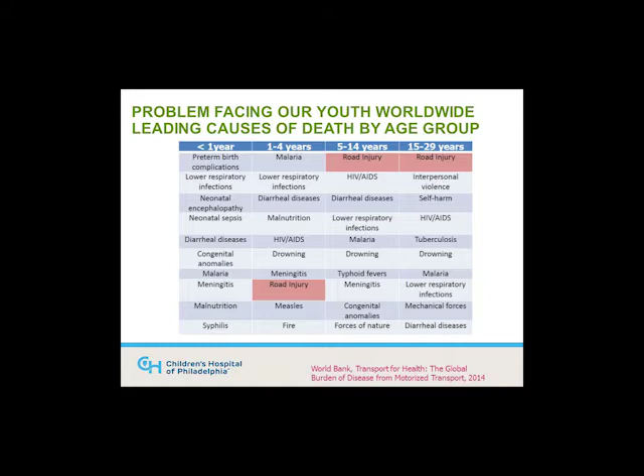to help see the future where we can actually bring these injuries to zero. So a quick overview: if you look at the data from the World Bank Transport for Health, this is data from 2014, children younger than 14 years of age—road injury is still one of the leading causes of fatality by age group. If you look at ages 1 through 4 beyond, and up till teenage drivers and young adolescents, you can see that road injury, motor vehicle crashes, are still the primary cause of injury and fatality.

And this is primarily attributed to quite a lot of things. One of the coolest things we can attribute it to is increased restraint use. Data repeatedly has shown that the overall percentage of restraint use has increased. More stringent highway safety laws, and looking at the vehicular aspect of it—advanced restraint systems, airbags, roof curtain airbags, you name it, there are a whole bunch of airbags in cars now. Also, structural integrity of vehicles has improved significantly, causing this number to go down.

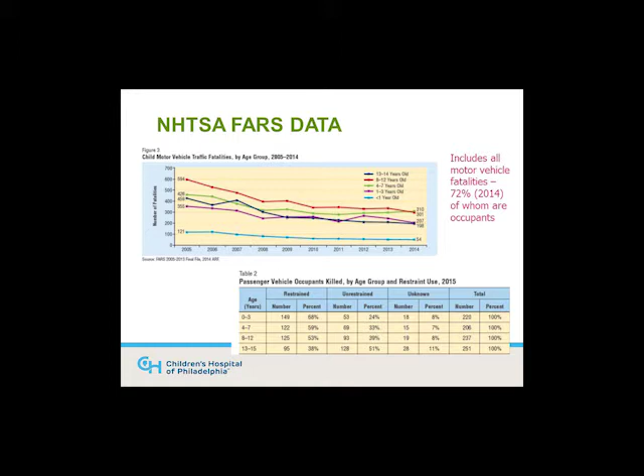If you look at some newer data from NHTSA, looking at what's called FARS data, or Fatality Analysis Reporting System data, this is actual fatalities. You can see the number—if you trace down the red line in the top plot, which is looking at ages 8 through 12 years of age, it's almost half the number in the last decade. But one thing I'd like to point out is that number is still in the 3 digits. We're not in the double digits, single digits, or even zero, and that's where we'd like to get to in the next decade or beyond—to look at those injuries.

One thing which is very interesting is some of the latest data that came out recently actually shows an increase in fatality.

The overall fatality rate has actually changed by about 6% in children under 16 years of age, and there are several different attributes to it. Most people associate this with improving economy and reduced gas prices, so you actually see a lot more vehicular density causing vehicles to interact more often, leading to fatalities or injuries. But obviously we need to do more research to understand the complex nuances to interaction, and understand that it's not a simple solution. There are complex entities going beyond to bring those numbers down.

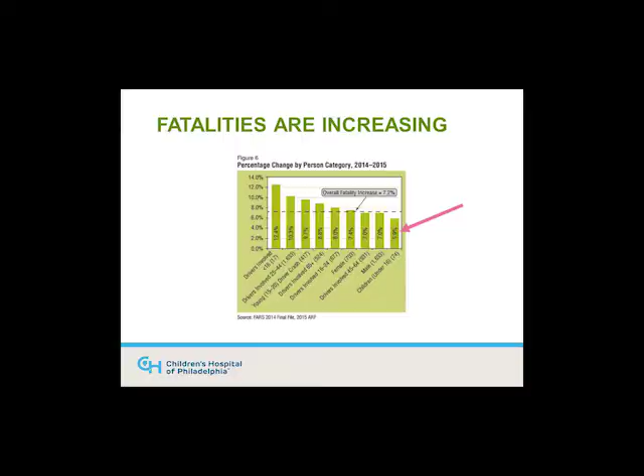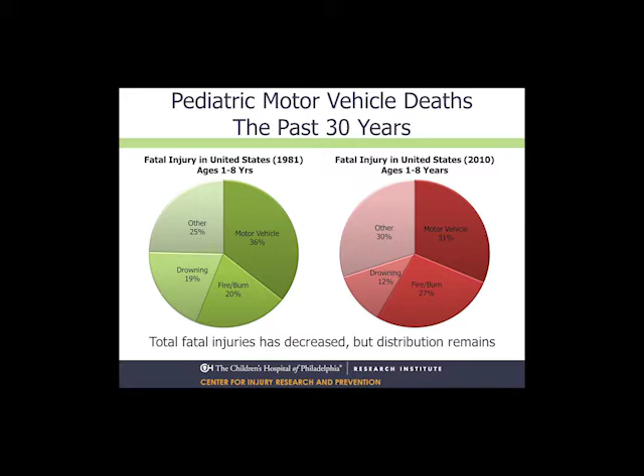So if you look at the last 30 years, if you pay attention to the left pie chart here, this is data from the early 1980s. The percentage, the distribution that you see in motor vehicles, that's about 36%, is still very similar. So if you fast forward by 3.5 decades, you would see that motor vehicles still has a substantial chunk that contributes to fatal injuries and injuries as such. Child motor vehicle injury is a very, very significant problem.

So with that in mind, I'd like to jump along and get to how did this all start? How did we even get down to understanding biomechanics, understanding how the human body behaves to unintentional external loading?

It all kind of started off in the early 40s and early 50s. Some of you have heard of the Stapp car crash conference, one of the premier leading conferences for our area of research. It's actually in honor of Colonel John Paul Stapp, who was at that time one of the pioneers for understanding high-speed impacts. He was a physician in the U.S. Army Corps, and he said there has to be a better way of studying these injuries.

At that time, we didn't have crash test dummies or computational modeling or other surrogates for human studies. So he said the only way I can get a better sense of this is to actually put myself in a deceleration experiment at that time using a rocket sled. You'd be surprised that he actually went from about 600 miles an hour to almost a standstill in about 1.4 seconds, experiencing about 46 Gs. I'm just going to play this video.

So this is a rocket sled. You can actually see John Paul Stapp strapped himself into one of these seats there. He crashes into a rigid barrier. That's actually a camera system floating about to keep track of what's happening and how fast he's actually going through. And it's interesting, he actually obviously survived this crash. He suffered very severe retinal detachments, but he was sort of the pioneer for human studies, human biomechanics studies, really trying to understand what it takes for the human body to sustain injury.

What are those limits? And obviously this was an adult study, but this kind of set the road and the path ahead for understanding what are the external forces, what are the boundary conditions, what are restraint systems.

And you'd be surprised, if you take a look at this again, you'd realize he's going at 600 miles per hour and comes to a standstill. Most automotive crashes today are looking at 30, 40, 50 miles per hour, and you see fatalities. So then you start thinking, how can he sustain or survive a deceleration so fast, but a 30, 40 mile per hour crash, people don't survive?

So that's when we try to understand the limits of the human body and also what sorts of deceleration, acceleration forces, injury tolerances, vehicular intrusion into the compartment, airbag systems, and so on would play a huge role in injury mitigation and understanding injury.

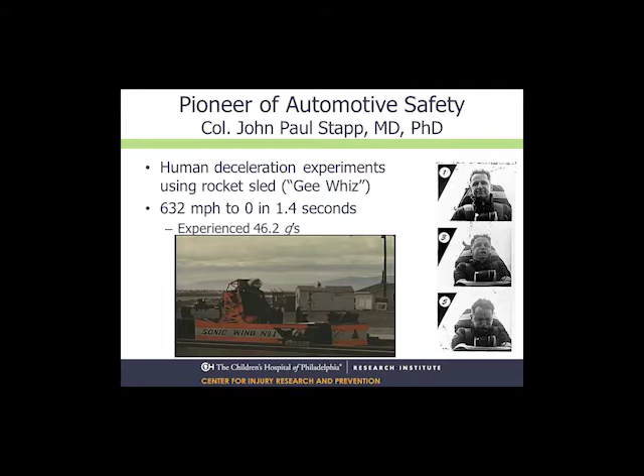So with that in mind, I'll jump along to looking at child passenger safety and the first car seats out there. Some of you might still see a few in the field. I'm a child passenger technician as well, and I see all sorts of seats in the market today. But thank God, we see some newer models out there and people actually doing a good job installing.

Some of the earlier seats were literally office chairs which were strapped onto cars, tied with ropes and other systems to protect the child. It wasn't a bad design, but it didn't really do a good job. And we've seen that we've really come a long way in safety. That's how things were in the early 40s and 50s, almost like a hoop sort of mechanism going over the car seat.

But Volvo in the early 60s was sort of a pioneer in coming up with the 3-point seat belt. And since then, things have really sped along in terms of regulations, CPS laws, and some advanced testing surrogates.

We're going to talk a little bit about anthropomorphic test devices, or dummies, or ATDs, and how NHTSA and the Department of Transportation is playing a huge and fantastic role in trying to understand these injuries and coming up with relevant laws to mitigate those systems.

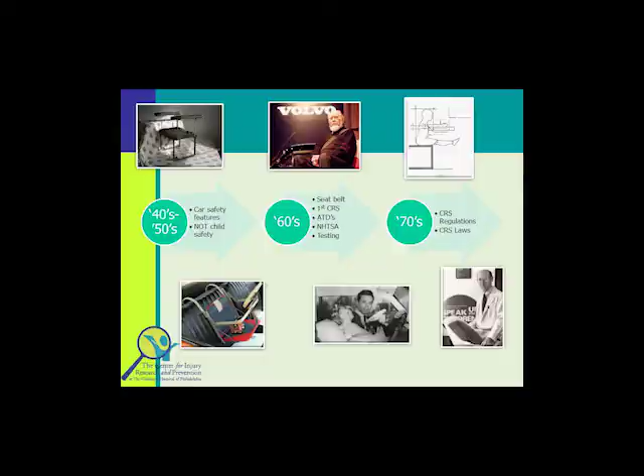So in trying to understand crashes, one of the first things we really need to pay attention to is what are those injury mechanisms, what are those stages in a car crash. For those of you not familiar, a single car crash actually consists of 3 broad collisions. The first collision, if you think about it, is the actual vehicle impacting the object.

This could be another tree, another car, another system as such. So this is the very broad crash dynamics that you're looking at. The second collision that's happening is the occupant kinematics. This is when the actual driver, passenger, or occupant interacts with the vehicle structures. These could be seat belts or airbags, or he or she is not restrained. It could be the steering wheel hub, or even the passenger compartment, or the seat in front of you.

Now the third collision is something that we don't really see or observe immediately. This is what is called impact biomechanics - internal organ motion. So if you think very broadly, you have your vehicle hitting, say, a tree, you have your occupant impacting the hood or the vehicle structures, and then you have internal organs. So you have your brain moving within your cerebrospinal fluid, impacting the front of the skull or the back of the skull - that's where we see contusions, coup, contra-coup injuries.

You have your internal organs, your heart kind of moving forward or backward based on the direction of impact, colliding against the internal rib structures, the sternum, the aorta moving around, causing aortic tears, aortic lacerations. So it becomes very, very challenging, and trying to understand how to mitigate these systems or this organ motion is almost impossible. I'd love to hear your comments and questions as to how we think we can actually reduce this impact. But as an engineer, we go back to understanding collisions 1 and 2.

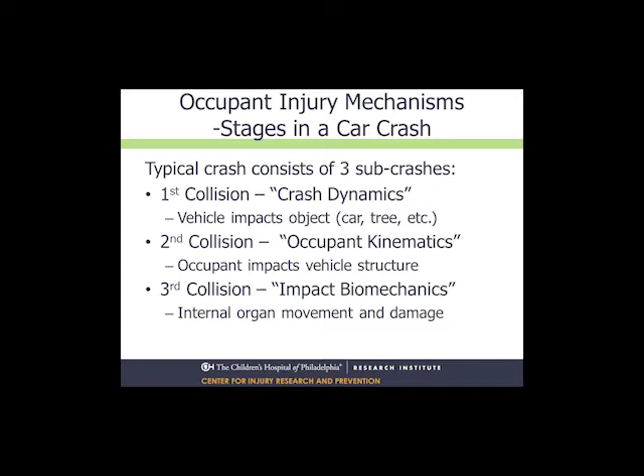So is there a way we can control these dynamics? Can we control this impact? For example, if you have a car turning opposite - I'm going to play this again - so if you have a car making a left turn across the opposite or oncoming lane, this is one of the most common types of crashes. You get hit broadside by an oncoming car.

And the types of car, the relative sizes of these vehicles, whether it's a small sedan versus a truck, whether it's an SUV versus a small sedan or a mini car, plays a huge role. Speeds and directions, and going back to the laws of physics, it's about conservation of momentum. Objects with higher mass have lower velocity in collision, so the energy transfer is basically transferred to the smaller vehicle, and you can actually see those deformation patterns.

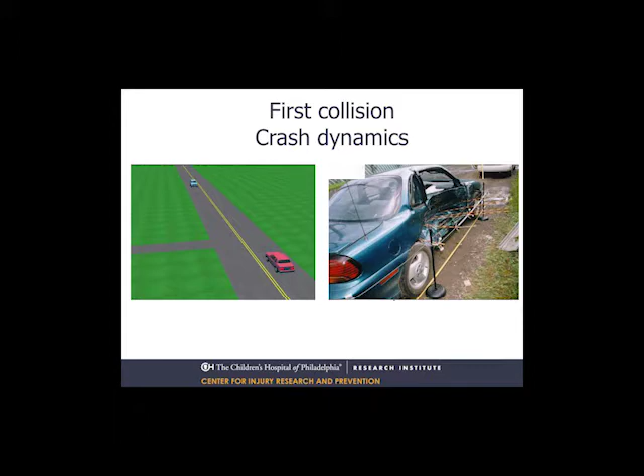So as an engineer, we go down to the scene, we look at these deformations, we kind of understand - obviously there was nobody there to tell us firsthand. So this is sort of post-crash analysis, or accident reconstruction as we call it, looking at how did this door structure collapse, what sort of structures can we build around it, maybe airbags, maybe strengthen the system, which can actually mitigate intrusion or structures coming in contact with the occupant.

The second collision is occupant kinematics. This is where you would really put effort into understanding how dummies, or in this case actual occupants - could be kids, could be adults in different seating positions - and how they move. What are their initial positions? Were they restrained? Did they have their arms outside? Different seating positions, and you can actually see the video here.

The video on the left is looking at unrestrained children. This is a video from the Insurance Institute for Highway Safety. Obviously you won't have a child driving, so it's just an example here, but these are unrestrained kids both in the front seat and in the back seat, as an example to understand kinematics.

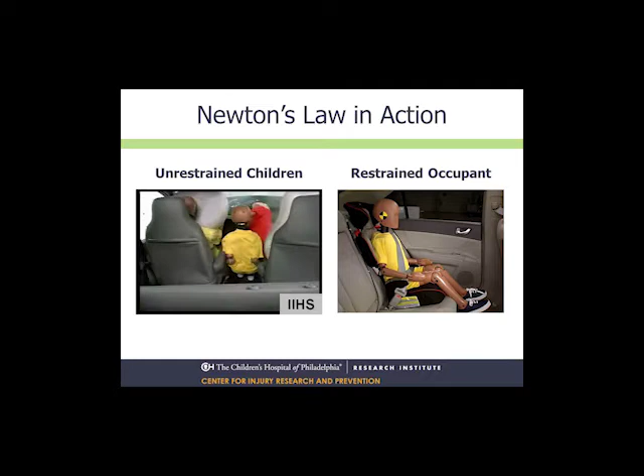And this is obviously a full frontal impact in a minivan. You can kind of see where these kids land up - impacts the passenger airbag, impacts the windshield - very severe injuries of course. And now another example is looking at a kid seated in the back seat.

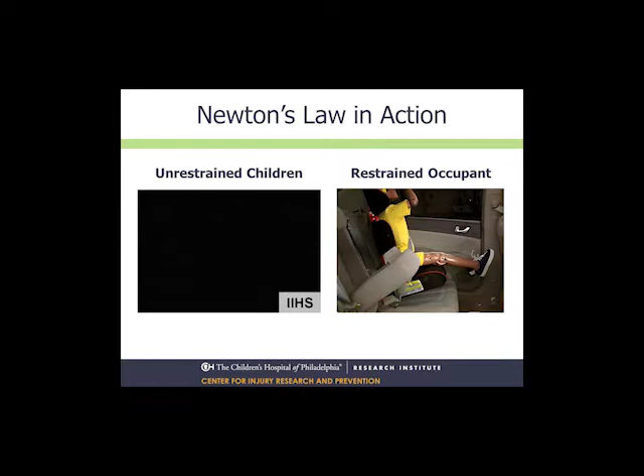This is a 6-year-old dummy in a high back booster seat. So the kinematics is a lot more controlled, restrained. Obviously, the head doesn't hit the front seat.

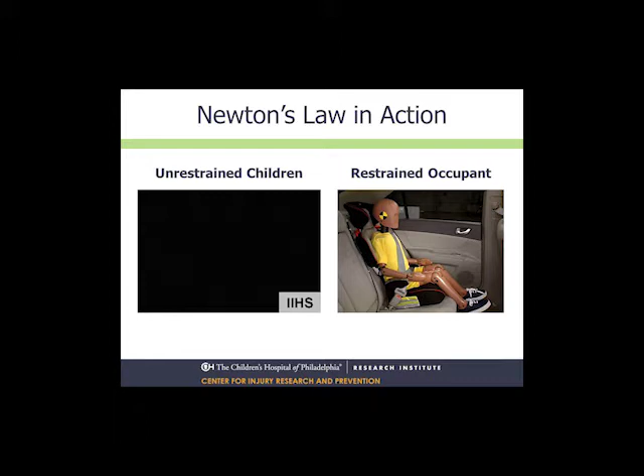If you go back and look at this data again, whether we're looking at accelerations, deformations, or any sort of kinematics, we look at whether they contacted the side doors, the front door structures, or the front seat, and understand how we can do a better job. It's a constant process of improving these kinematics based on seat designs, internal geometry, and airbag systems, to make sure the third collision, the injury biomechanics piece, doesn't really happen. So the first step is making sure we don't see a whole lot of tissue damage, organ damage, or fractures.

There are some things that can be fixed very quickly. For example, take a femur bone, your thigh bone, one of the longest bones in the human body. A femur fracture is relatively faster and simpler to fix. I'm not undermining that injury, but compare it to an internal organ injury, like your brain rotating in the cerebrospinal fluid and impacting the front of the skull, which is an internal injury and quite difficult to diagnose and treat as quickly as possible.

So that's where we start going back and seeing, can I reduce my collision number one and number two? Can I build better systems, better vehicular structures, better crush zones, additional airbags? Some of you might have driven fancier new cars with side airbags, side torso airbags, knee bolster airbags, front airbags. Hopefully it hasn't deployed anytime soon, but it's about distributing that energy over a larger surface area and making sure very little or no energy transfers to the human body.

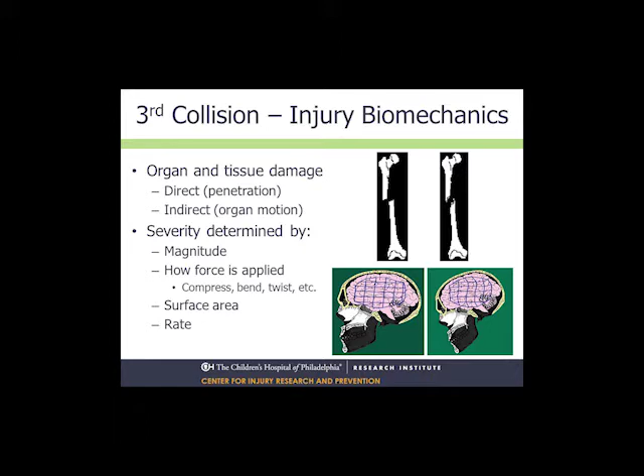That's where computational modeling comes along. So we can take care of collisions one and two, but how do we really understand what is happening in these organs? How do I go and take a look at, for example, the aorta?

In this case, I was looking at a fatal aortic injury. This is a real-world case that we simulated, trying to understand in this instance of crash what really is happening to the aorta. With aortic tears or lacerations, the heart is still pumping blood, so you have blood pooling into the chest cavity, called exsanguination into the chest cavity. This is a very quick process, and unfortunately quite fatal as well.

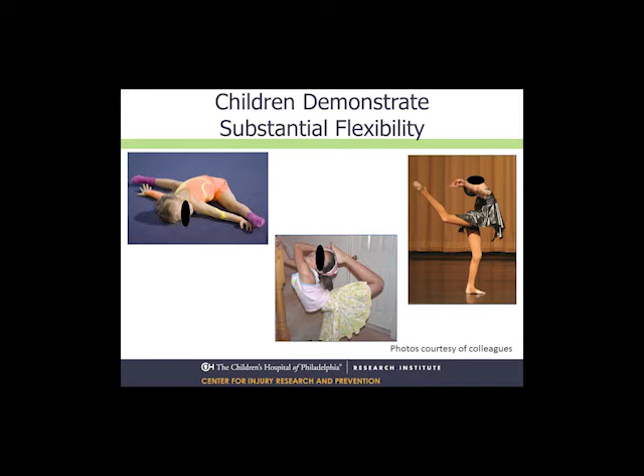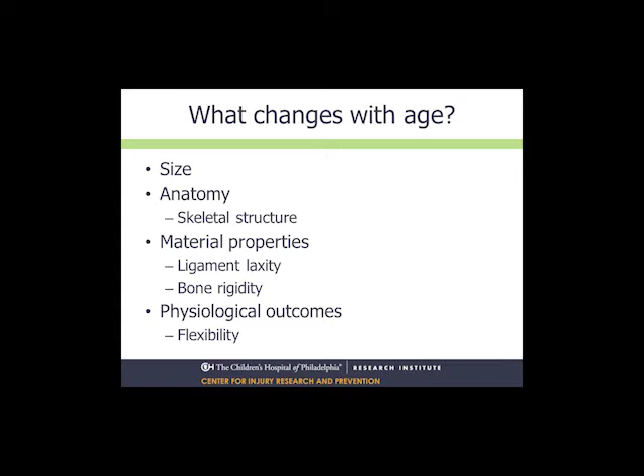I have two young kids, I'm sure they'll really enjoy seeing these pictures. But kids have substantial flexibility, because of their anatomical differences, their size, their anatomy, skeletal structure, and material properties, which are still lax, be it bone or ligaments. This all leads to flexibility much different from adults. One thing we always say in our field is kids or children are not young adults. That's a differentiating tool for us. You cannot really take adult data, be it a 50th percentile human or a 35-year-old male, scale it down based on size or age, and then say, okay, now let's use this data for kids.

It doesn't work that way. We really have to understand both the anatomical and physiological development of kids, how they sit, how they move, and their injuries, which are different from adults. They're based on what sort of tolerances you have, what impacts or external forces lead to injury, and it becomes challenging to understand pediatric injury because you don't have a good surrogate to study it.

We do have pediatric crash test dummies, but there are drawbacks and challenges with this. What other tools exist? Crash tests with PMHS, post-mortem human subjects, have been extensively done for adult research, but we don't do that work with pediatric specimens. Animal studies are common too, using pigs, bovine, porcine surrogates, but it's very difficult to draw an age equivalency to, say, a young 2 or 3-year-old, so that's something we don't do either.

The other thing that comes down to is human volunteer tests. Really, is that what we end up doing? To some extent, yes. This was a fun project we did for work, and how often can you actually go to an amusement park for work, right?

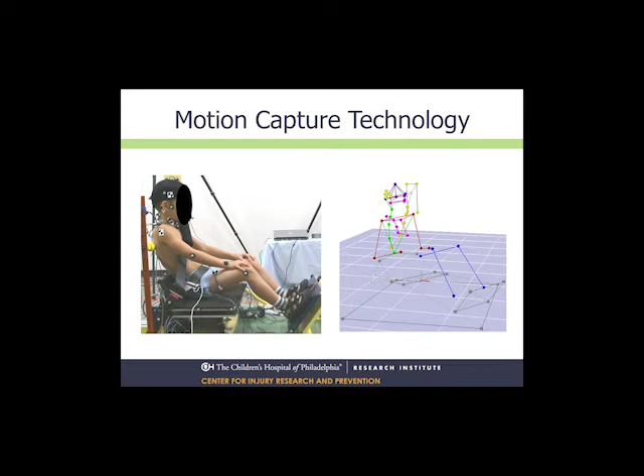We have markers set up on bony landmarks, on the wrists, the elbows, the ankle and knee joints, and the head, and we track them in 3D. You can see on the right how these markers translate human body motion into kinematics. I won't go into detail on the rest of the study, but we ran several systematic evaluations comparing young 6-year-olds, 8-year-olds, young adults, and older adults.

If you recap some of the earlier slides, I said kids don't move as similarly as adults, and that's exactly what we found. They have a bigger trajectory. If you trace this black line, that's the head top motion of a kid in a low impact, this is a bumper car impact.

You might question, hey, this is a bumper car impact, it's probably less than half a mile per hour delta V change, but in an actual crash we have close to 30 or 40 miles per hour delta V. How do we correlate this data? That's where computational models come in. We take this data, plug it into computer models, and run those models at 30, 40, or 50 mile per hour delta Vs to understand what really happens in higher speed or higher impact crashes.

As you can see, the kid moves further forward. This is a 6-year-old compared to a 30-year-old, so their trajectories are longer, broader, and further down. This tells us they have a lot more flexibility, spinal flexibility in their anatomy. The way their cervical, thoracic, and lumbar vertebral bodies are set up is slightly different than a 30-year-old, whose vertebral changes have stopped and matured, with settled vertebral angles and facet joints. There's a lot more laxity and flexibility in a younger kid compared to a 30-year-old.

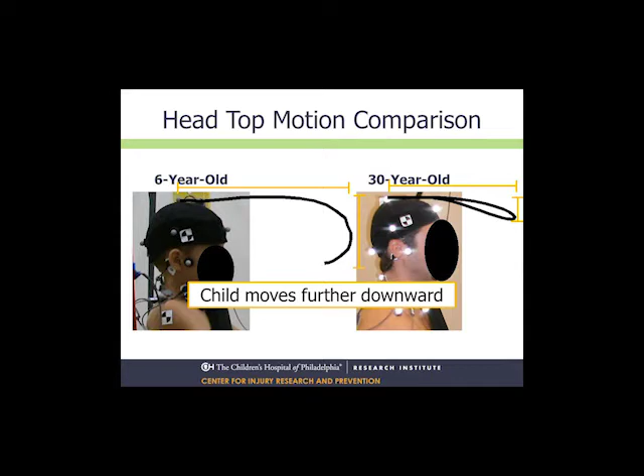Now, if you take this data and bring it back into your world, you would immediately realize that if a 6-year-old is in a booster seat, seated higher up and moved forward in the back of a car, he has a potential possibility of contacting the front seat or the door structure because they're a lot more flexible. That's exactly what we do, translate this data back into real world dynamics.

Most vehicle manufacturers and child seat manufacturers don't do volunteer tests, they use a crash test dummy, or ATD, anthropomorphic test device. What really happens is these dummies are similar—anthropomorphic means human-like—they are similar to a human, but they're not really human. They don't have those responses, they don't have internal organs.

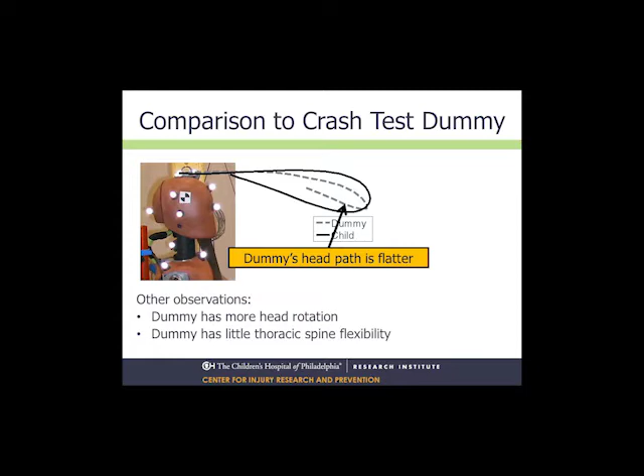They're not as flexible. If you look at the picture on your left, you can clearly see that the cervical spine is a big black structure, it doesn't have the individual vertebra. So their rotations, their flexibility is a lot different. As you can see, the dummy is the dotted line and the solid line is the child itself. There are subtle differences in how the dummy moves and how the child moves.

What I'm not saying is dummies are bad—they're actually great tools to study this motion. But what we're trying to do is constantly improve these dummies. Why? Because these are the dummies that help certify manufacturers, vehicle manufacturers, child seat manufacturers, in adhering to Department of Transportation standards, making sure these car seats and child seats actually mitigate real world injuries. So we make a small constant improvement every time new test data is released.

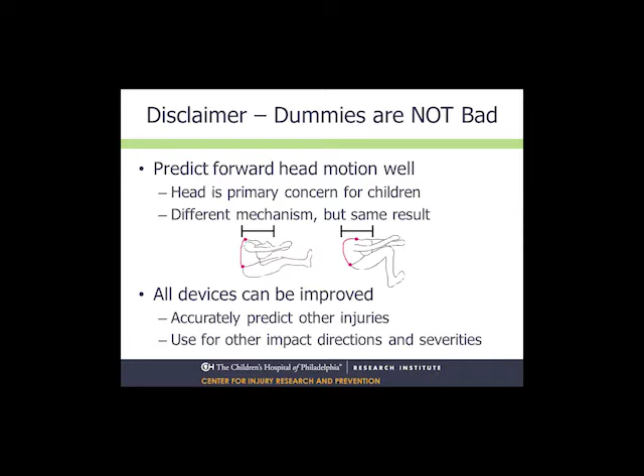So with that in mind, I'm going to jump over and spend a little bit of time on some of those research studies. We're doing well on time here.

As I said before, the simple story isn't enough. What we need to do is really make a dent, get down into precision prevention. What we do is understand research-driven change for safer roads.

We go back to real-world data. We interact with clinicians, interact with vehicle manufacturers, interact with child seat manufacturers, and ask, what is that concerning problem that you have that we can help make a difference on? One such project is quantifying CRS fit.

As a technician, you would always face this problem, I'm sure, when helping parents and caregivers install their seats. Either the seats don't fit properly, you have to move the front seat, move the side seat—pool noodles, very common and very popular. But why is it that we have to struggle to install a child seat in a vehicle? Shouldn't it automatically fit in there?

If you look at what's happening in the market today, car seats or child seats are getting bigger and bigger—side impact protection, trying to accommodate for bigger kids of the same age and size, going up to higher weight limits. We saw some at Lifesavers going up to 50, 65 pounds. However, on the flip side, vehicles are getting smaller and smaller, accommodating for EPA regulations, gas mileage, city driving. They're getting smaller, car seats are getting bigger.

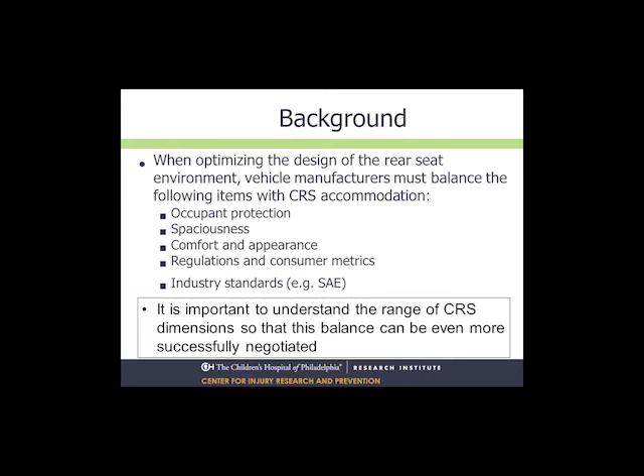What do people do right now? Both vehicle manufacturers and child seat manufacturers pick up a few seats—go to a brick and mortar store, buy a couple of car seats in the market, go install them in their vehicles in a parking lot. We did a quick assessment: there are close to 300 vehicle makes, models, and variations in the US market today, and about 290 or close to 300 car seats. If you do a full factorial analysis, that's about 90,000 installations in different seating positions.

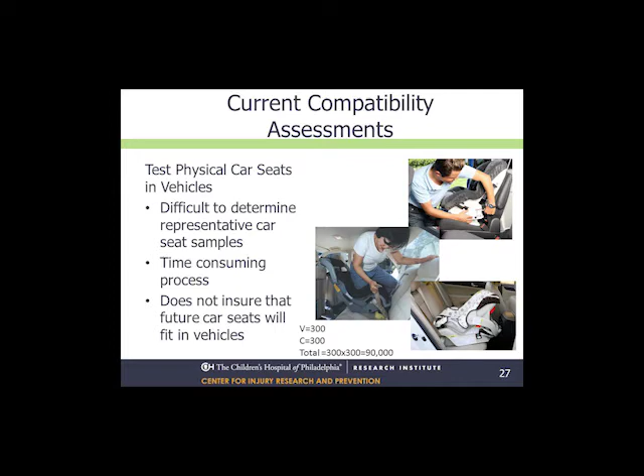And it doesn't end there. If you have a 6'2" driver who likes to push their seat all the way back, you're squishing your car seat in the back—it's going to lift up if it's a rear-facing seat, there's hardly any space there. It's obviously a time-consuming process and could take forever.

There are some things out there—some newer car seat manufacturers and a lot of other manufacturers now scan their car seats and bring it into their digital world.

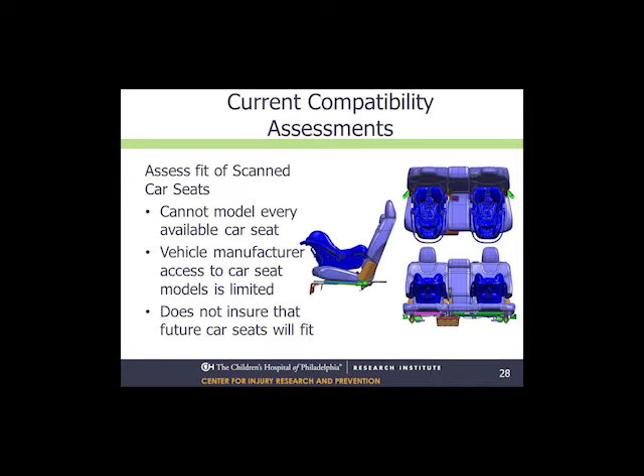But there's only so much you can do by scanning current car seat models. It's not future-proof. So this is where we said, how can the collective we—child seat manufacturers, stakeholders, vehicle manufacturers—actually help understand this design process better?

So this is when we actually started scanning and bringing in several car seats in the industry and trying to create what is called a virtual surrogate. In my presentations, I typically ask the audience to lift up their hands and say, have you ever used an Xbox Kinect sensor? If you have, you've probably interacted with it—this is a tool that you move around, and it recognizes your skeletal system.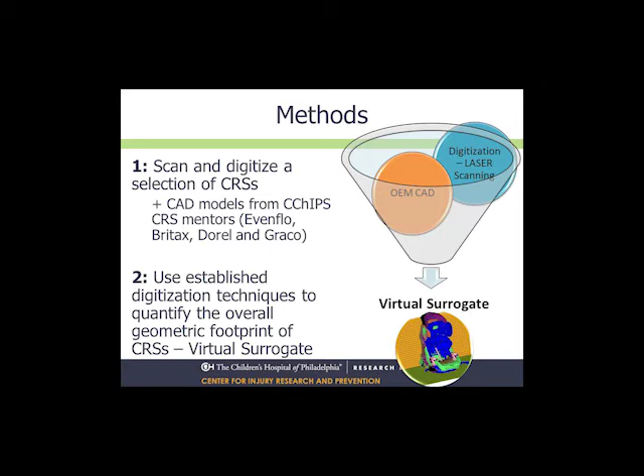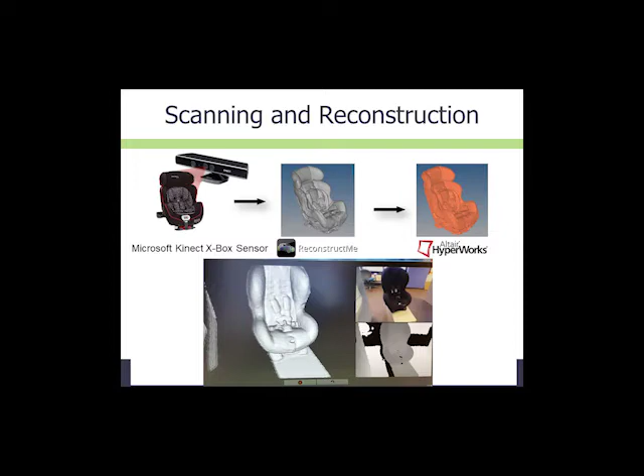What we did is we took a Microsoft Kinect Xbox sensor and converted it into a handheld scanner. It's pretty cool—you can walk around a car seat, it scans it in real time, and converts it into a computer model that you can bring into a design environment and make changes to. It's quick, gives very high resolution, and is very low cost—about $100. So we scanned every single car seat in the US market.

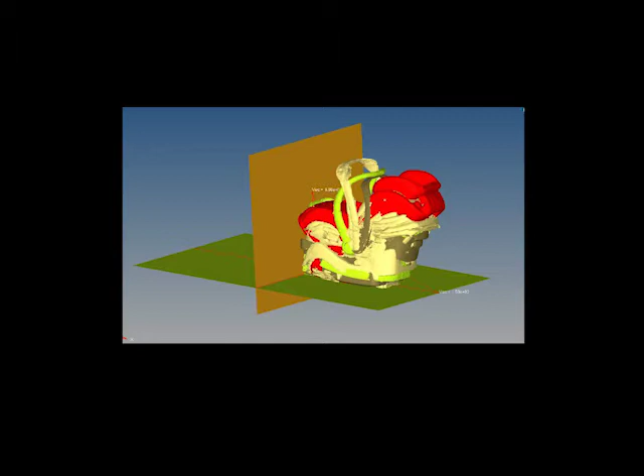The video you see is an example of a rear-facing child seat. We brought in all the rear-facing CRSs, including infant seats, infant carriers, and convertibles in rear-facing position—with base, without base, cup holders, moving the handlebars to different positions, moving the hood all the way up or back. We installed them as per manufacturer recommendations.

This was a virtual installation. Those planes you see—the green plane and the orangish-yellow vertical plane—are the seat pan and seat back angles of the average US second-row seating position. This is data we got from the literature.

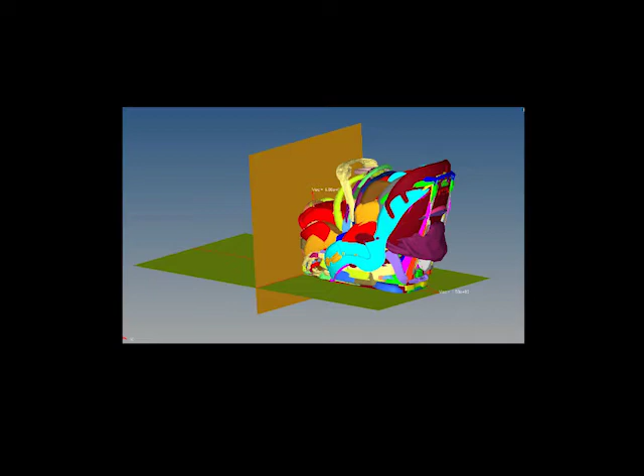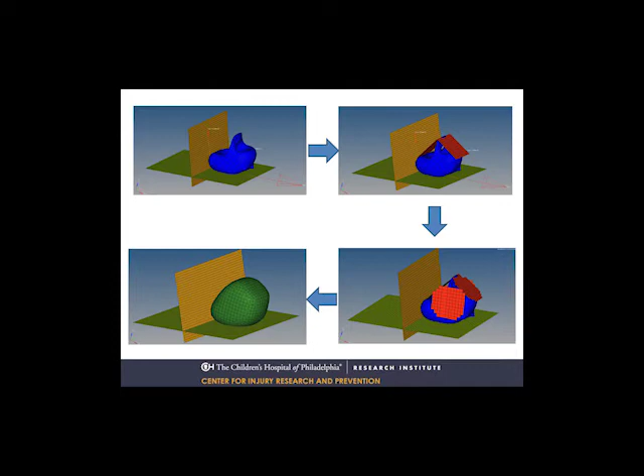So we brought in all these seats, overlaid them on top of each other, and started converting them into what is called a blob. We wrap them around—it's almost like wrapping a gift. You take a non-uniform object, put wrapping paper around it, then put it in a box. That's exactly what we did: we took all these car seats, shrink-wrapped them, and created bounding volumes—a virtual surrogate, or a blob.

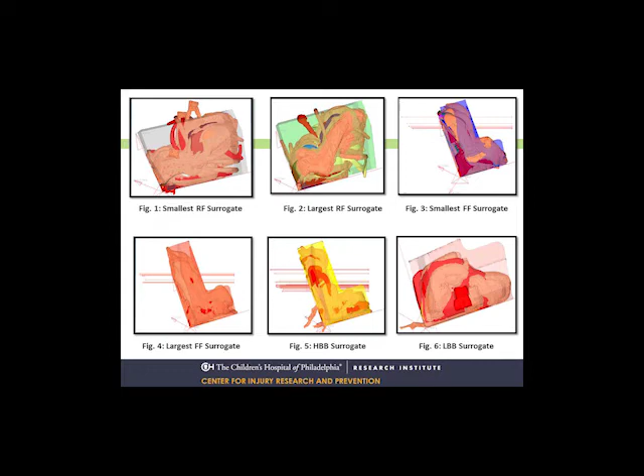I'm happy to say this is one of the largest studies we have ever done, comprising close to 300 child seats in the US market—pretty much every single car seat out there as of last year, including some of the newer ones with wheels and so on. We got them all.

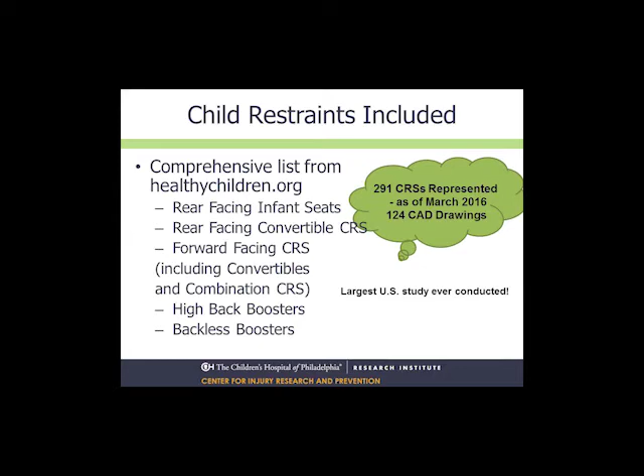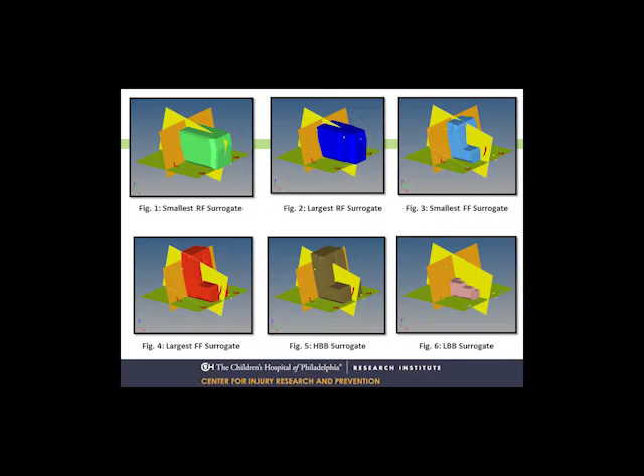So we classified them into rear-facing, forward-facing, high-back boosters, low-back boosters, and started creating bounding volumes. One advantage we have is we worked with both vehicle manufacturers and car seat manufacturers to decide how big this volume should be. It's not just a representation of current seats in the market—bounding these blobs, or creating these surrogate models, helps us look into the future to understand what new models car seat manufacturers are coming out with. This helps us define a box around it and give this virtual surrogate to manufacturers to help them install it in their internal systems.

So this is a virtual installation ahead of time. With this data, vehicle manufacturers can go back and look at their car seats and understand how car seats fit in their current design. We are in 2017, and most vehicle manufacturers are already looking at 2020 vehicle model years, so this data really helps them design these interactions internally.

And what does it do for us? As a consumer, as a caregiver, as a parent, it really helps the end user. That's our goal—to help moms, dads, caregivers, and parents get the right fit in their vehicle, so they don't have to get a seat from, say, Amazon, bring it home, and then realize it doesn't fit in their small car, forcing them to either return it or just push it in and keep going. We want to make sure the right car seat is installed correctly every single time.

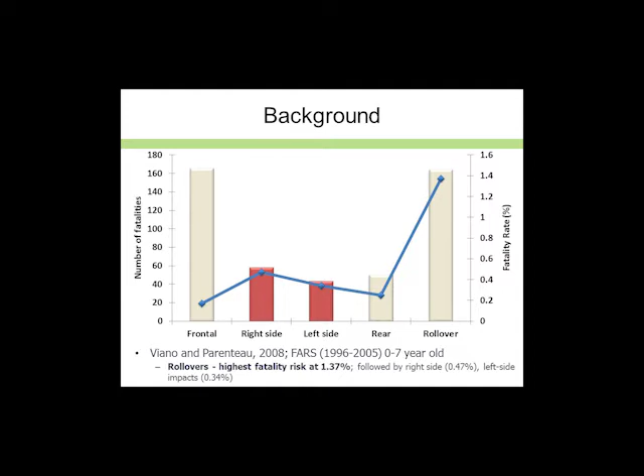In the next couple of slides, I'll talk a little bit about side impacts, those little maroon bars that you see looking at right side and left side impacts. Just to set the playing field here.

If you look at the actual vehicle, looking at the hood itself, whenever you hear 0-degree impact or 360-degree impact, it means it's a full frontal impact. It's almost like a clockwork diagram. A 90-degree impact is impact to the right side of the vehicle, 180 is a rear impact, and 270 is to the left side, which is basically where the driver is seated.

Near side is if you get hit at your seating position. Far side is if you get hit on the opposite side of your seating position.

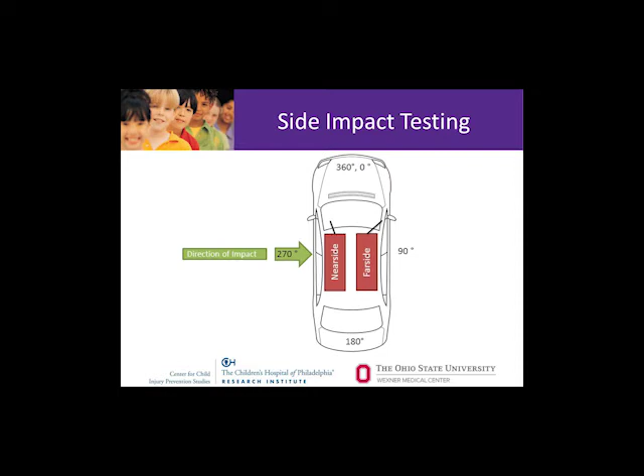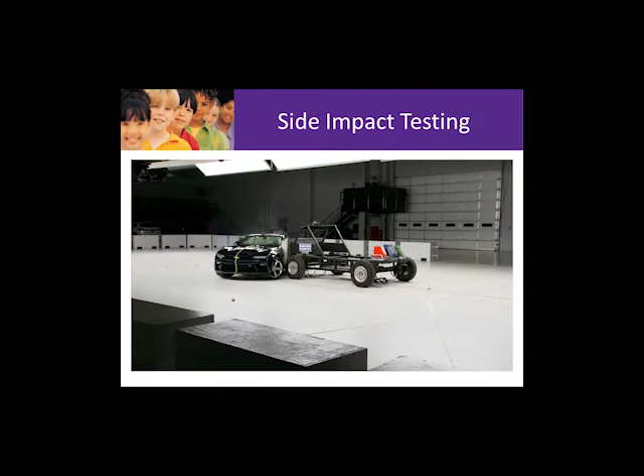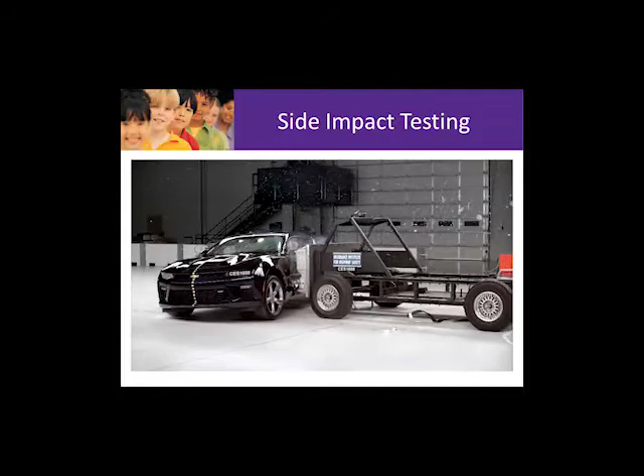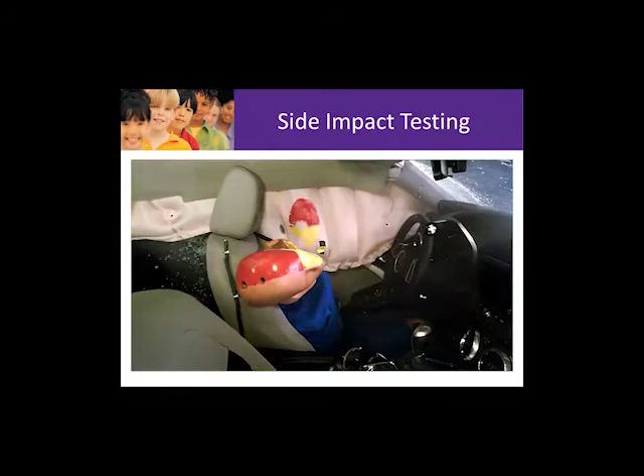So here's a quick video before we look into side impact testing from IIHS, the Insurance Institute for Highway Safety. This is called a moving deformable barrier, usually set up at about 40 miles per hour. It has a slight angle to it to replicate the issue of seeing a car coming towards you, braking, swerving, so it doesn't hit exactly like a T-bone impact. There is some amount of angle there, which is called crabbed.

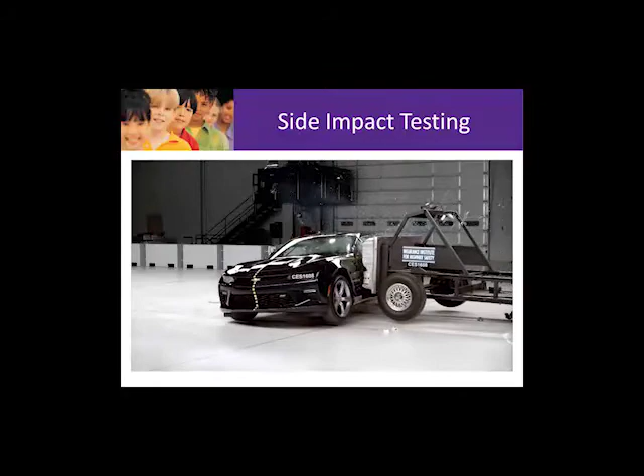So this is coming in at about 40 miles per hour, impacting near side to the driver, and you can see the airbag deploy. There are dummies seated near side as well, which are instrumented, measuring different data: accelerations, deformation in the head, chest, and pelvis. There are sensors on the door panel which measure door intrusion velocity.

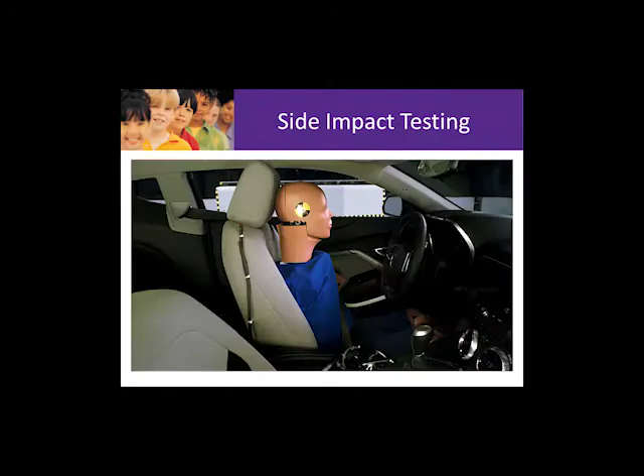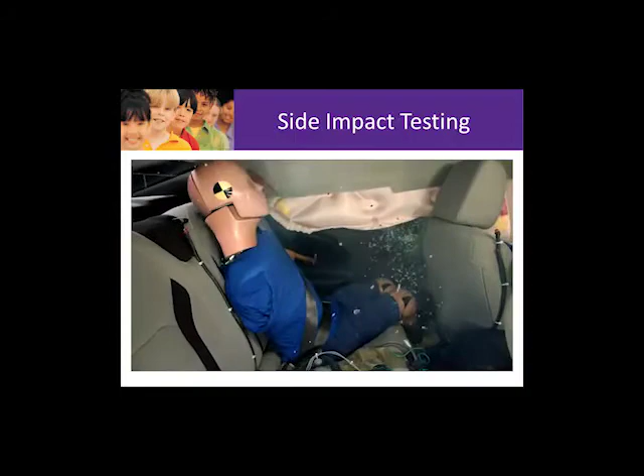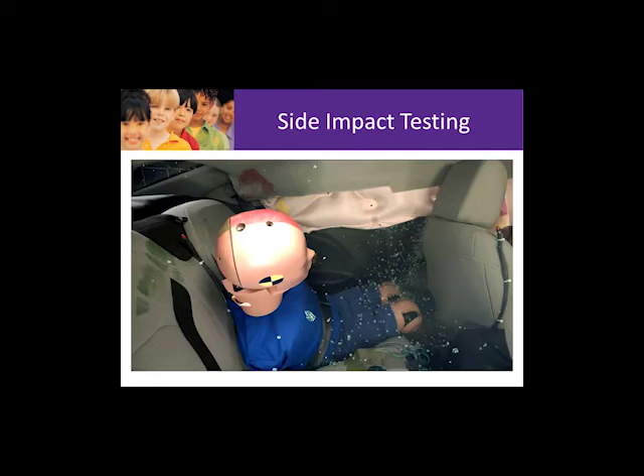Here's a view looking from inside. Most dummies are actually painted, which is a cool thing to do, to really understand where the dummy hit the airbag. You can see the paint marks left on the airbag, and pay attention to how deep the airbag deploys in the front and back seating positions. You can see it doesn't come all the way down to the window sill or your armrest, so it deploys about 1.5 feet into your seating position, primarily protecting your head-neck complex.

Airbags were introduced back in the early to mid 1990s. There are several different types, but today I'll talk quickly about side airbags or side curtain airbags. These are mounted in the side roof rail. Next time you sit in your car and look up to your top left, you can actually see it written in most vehicles: side airbags, or SRS, Supplemental Restraint System.

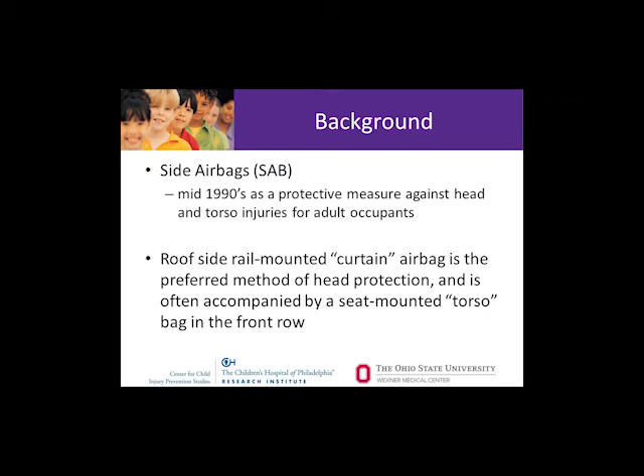According to NHTSA, some of the more recent data shows that near side impacts are pretty critical in terms of the injuries you sustain. AIS 3+ injuries, this is primarily looking at children under 14 years of age. The blue vertical bars are impacts near side, that is near side to your seating position, the maroon bars are center, and the green bars are far side.

Right away you can see based on where it gets hit, near side definitely has a higher probability and higher number of injuries, because all that's separating you and the other vehicle is about 6 or 7 inches of door structure, correct?

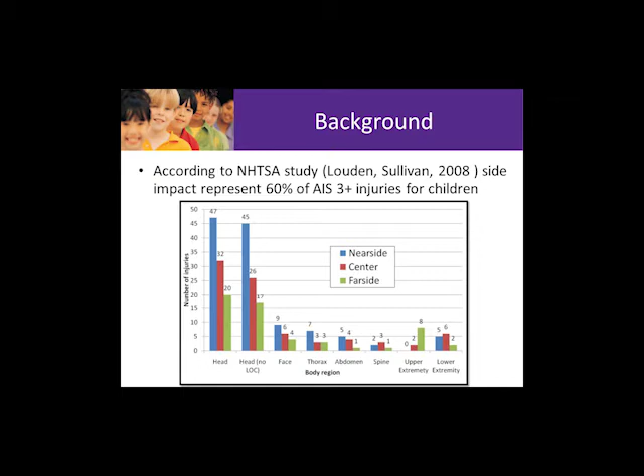And then you potentially or hopefully have an airbag that deploys between you and the intruding door structure. So we wanted to systematically understand how side airbags and side curtain airbags play a role in understanding where it gets hit, type of injuries, and what sort of injury prevention we can do.

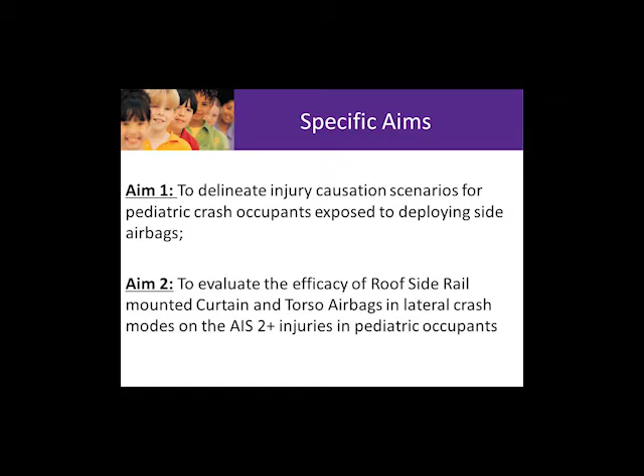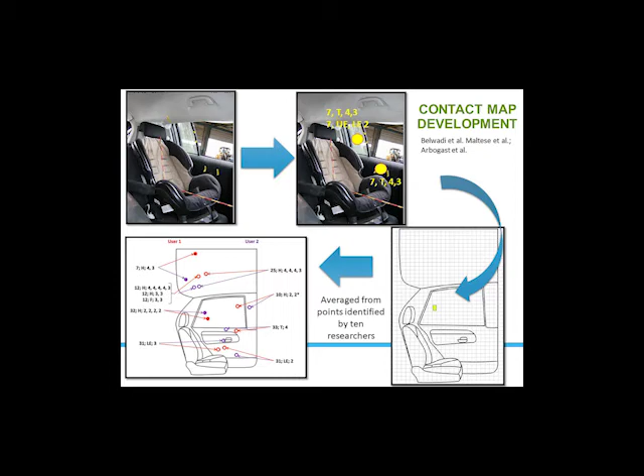So we quickly looked at the real world cases. This is called the Crash Injury Research Engineering Network database. This is one of the largest real world crash data systems out there, which gives details - we pulled up only the child seat data.

So this is where the car seat was installed, how it was installed, where the occupant was seated. We looked at kids 0 through 19 years of age and sorted them based on age, seating location within the car, whether they were in the front right passenger position or rear seating positions, whether they were near side or far side to impacts, near side to a deployment, and so on.

And then we sat down as a team and looked at contact points. So we defined contact points. Did the head hit the roof? Did the head hit the side door? Did it hit the side curtain? And came up with what is called a contact map.

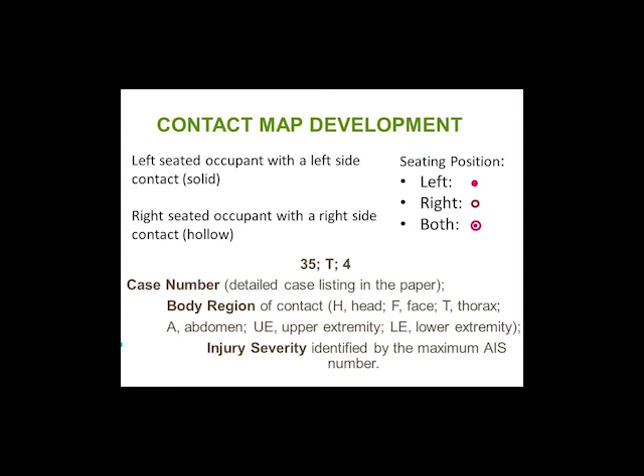This is just a nomenclature of how these maps are set up. The solid dots are left impacts. The dots with a circle are right impacts. And if you have both left and right overlapping, it's a dot within a dot.

So what you're seeing here is an outlay of a vehicle system - this is the right front passenger seating position, and the hazed out diagram is where the bag actually deployed. This is average deployment heights for different vehicles, and then you have the torso bag, which is circled out and oval.

The goal behind this was simple: to understand where kids get impacted. If this is, for example, a front right seating position, we primarily - and thank God - saw only kids beyond 9-10 years of age. We didn't see any kids in car seats or high backs or booster seats. We checked if there were any cases in there, and I'd say we were lucky we didn't get any. So these are primarily young adults between 9 and about 16 years of age.

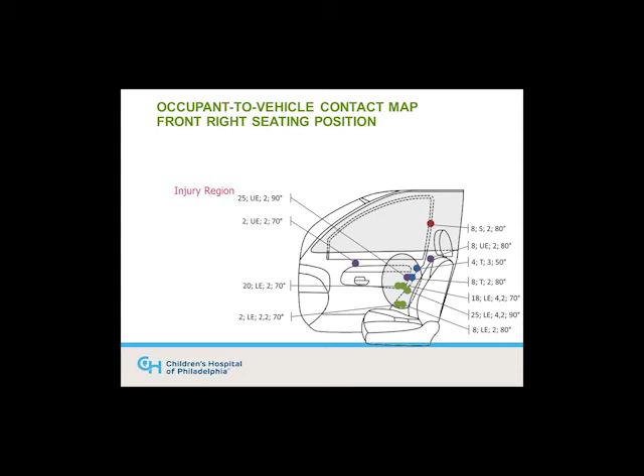If it says LE or UE, that's upper extremity or lower extremity. S is the spine, T is the thorax. As you can see, there are really not a whole lot of head injuries. So these are all restrained occupants.

Now if you look at the rear seat, it's interesting that - again this is the rear seating position behind the passenger side - most cars didn't have a torso bag. This is just a roof side rail mounted bag that was deployed. Keep in mind, these are all young kids in a car seat, either high back booster or forward facing. There were just 1 or 2 cases with a rear facing infant seat, and none of them had any contact with the door structure, which is very interesting.

But most kids seated in either a high back or forward facing seat did have some contact. So H is head, A is abdomen, T is thorax. You'd be surprised how high they actually move and impact based on the geometry or the impact angle and location.

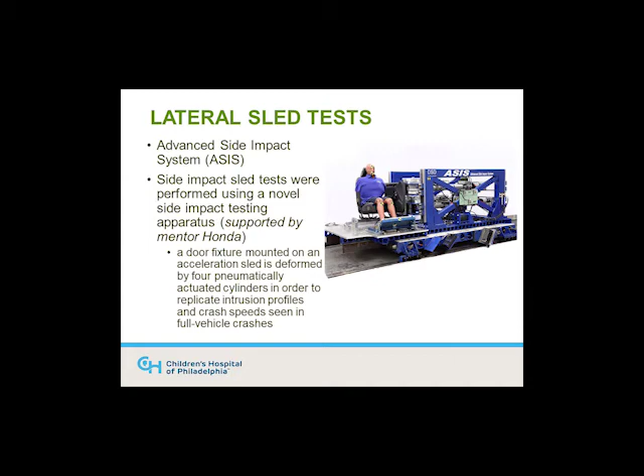We said, okay, now we're looking at real world data, but we obviously have to test further for different conditions. So we did a bunch of side impact tests and compared high back booster seats with low back booster seats and no CRS conditions. Let me walk you through this video a little bit.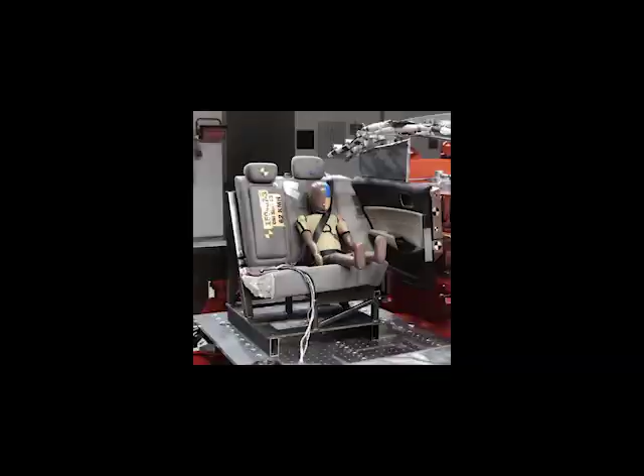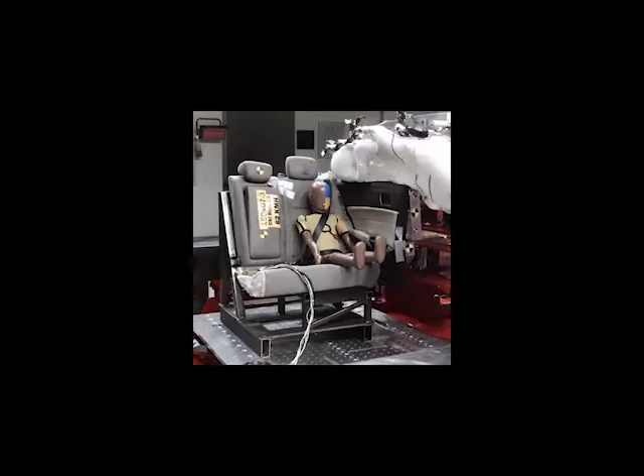We ran a bunch of other tests looking at side airbags. This is a side curtain airbag. The positions, deployment types, deployment timing, and angle were all set up to match a real world 4-door sedan. This is a rear internal door structure, a rear second row seating position with a high back seat. As you can see, there's a wing structure there.

This is a 90-degree impact, almost sort of T-boning into the rear seating position. This is a low back booster seat, again no backrest, with a side airbag deployed. You can actually see paint marks being transferred onto the airbag itself.

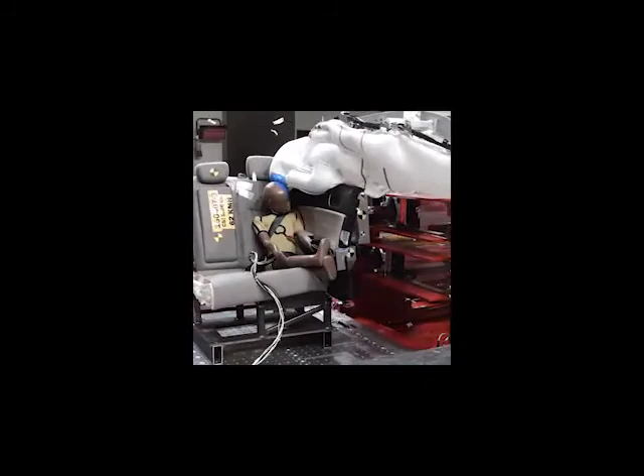We did run one other condition. We wanted to see what would really happen if you eliminate the booster seat itself and just run the 6-year-old in a side impact to understand contact points, locations, and injury itself.

So I'll quickly jump to the results. We did several FE models, finite element models, of human data. One thing we saw was side curtain airbags in general aided reduction in head and chest acceleration. So if you do have a side curtain airbag with high back or without high back seats, there was a reduction. However, there was a slight increase in some of these pelvic Gs. Again, this was not a significant finding, but more of an artifact of how the testing was set up.

In terms of CPS and how this is related, we are talking about side airbags or side impacts in general. In your curriculum, we predominantly focus on frontal impacts and frontal modes of crashes. But what we're seeing is we want to expand into other modes of injury in other directions as well. It's interesting and important to understand what's really out there, what type of seats, what type of airbags are out there.

And what we saw was very interesting. High back booster seats have similar injury responses as low back booster seats when exposed to a deploying side airbag. So if you have a side airbag, with similar impact conditions, high backs and low backs provide similar protection. But if you don't have a side curtain airbag, the ATD consistently displayed higher injury numbers for low back seats as compared to high back, due to its interaction with the intruding door.

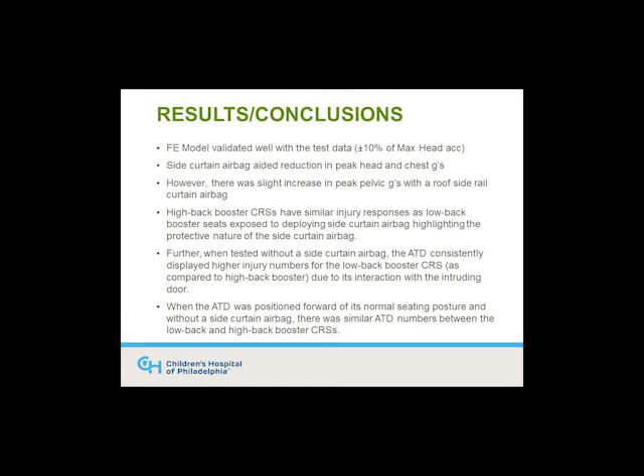So jumping quickly, since we're running out of time, we'll quickly talk about one other important topic: looking at rear-facing infant seats versus convertible seats for kids under age 1.

I'll quickly talk about some of the recommendations that came out, I think early last year, by Consumer Reports, which is this recommendation to transition to a convertible seat at age 1. I know we at CIRP got a lot of questions and confusion about what really is happening, whether we should move the kid around to forward facing or other things. But no, what Consumer Reports really said is you transition them to a convertible seat, but still rear facing.

And why did they say this? They ran a slew of sled tests with a 12-month-old child dummy called the Q dummy. The picture on the left is an infant seat, and the picture on the right is a convertible seat, exact same dummy, same weights, installed in similar seating positions.

What they found is in infant seats, or rear-facing infant seats, the top of the dummy's head contacted the front seat back almost 53% of the time in infant seats, as compared to about 4% of the time in convertible seats.

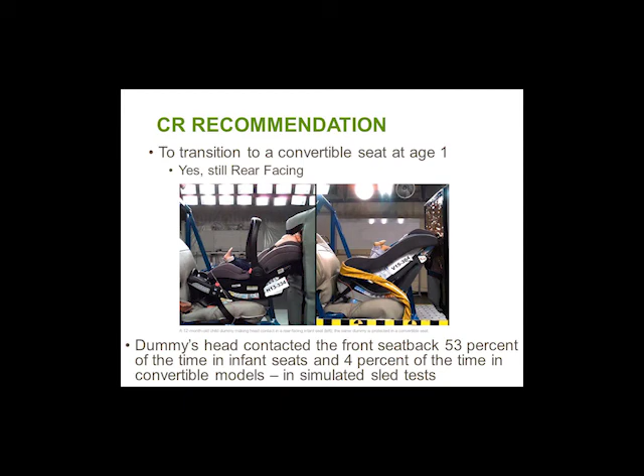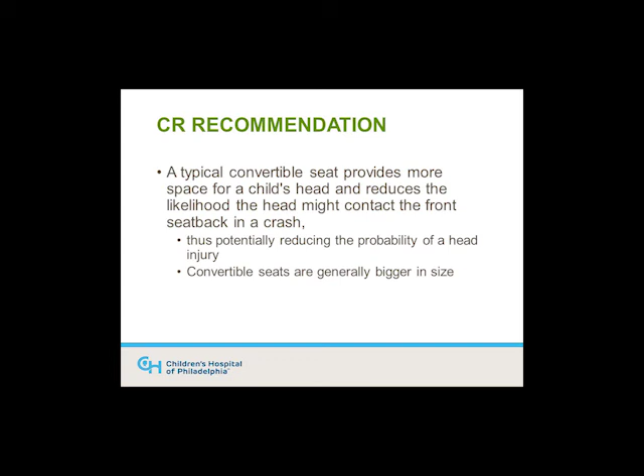Again, these are simulated sled tests. And why is that important? Because we're looking at head injury, the amount of space behind the child's head, and the likelihood of head contact with the front seat plays an important role. We talked about how kids are very flexible, their head motion and head trajectories are longer. Convertible seats, most of you are familiar with these, are slightly bigger in size and provide this additional space behind the head.

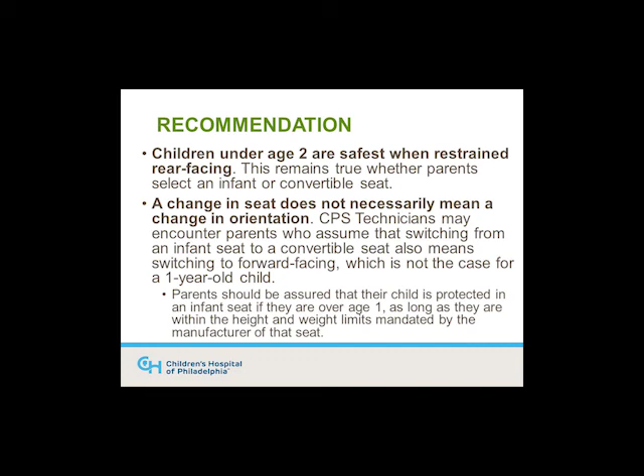So what is our recommendation? Obviously, kids under age 2 are safest when restrained rear-facing. This remains true whether parents select an infant seat or convertible seat, both rear-facing. A change in seat, whether you go from an infant seat to a convertible, a 4-in-1, or a 3-in-1, doesn't mean a change in orientation. I think that was the confusion that came out - should I change the orientation? You still orient them rear-facing, as long as they are within the weight and height limits recommended by the child seat manufacturer.

What I really want to highlight today is what's really important for us, for the industry-consumer partnership, is to bring down these injury numbers. We're talking about 750 to 800 fatalities every year for kids under 14 years of age in this country. So what we really want to find is common, achievable target goals that can help mitigate or bring this number down. We need each other to make a difference - technicians, child seat manufacturers, vehicle manufacturers, and stakeholders all play a huge role in mitigating this.

This is where precision prevention comes into play - a simple story is not really enough. This is a slide I borrowed from our director, Flaura Winston, and what she says is we are all sort of zebras out there - everybody is uniquely different. If you look around, computers, tables, boards and monitors are all mass produced, but each one of us is completely different. Biomechanically we are different, so what works for me may not work for you. We are getting into this phase in safety prevention where we're getting into precise, almost like a drug delivery system. We need to precisely fine-tune seating positions, seating postures, come up with realistic or naturalistic ideas of how kids and occupants sit, and then design systems specific to occupant size, shape, and use.

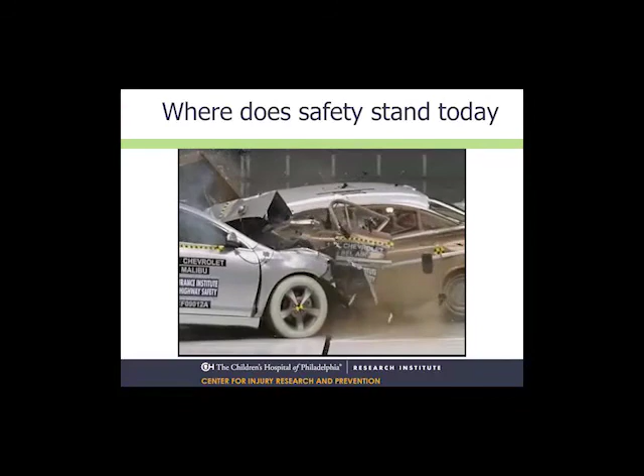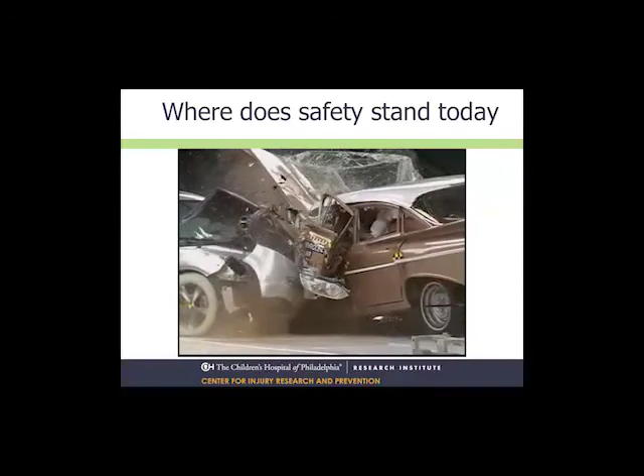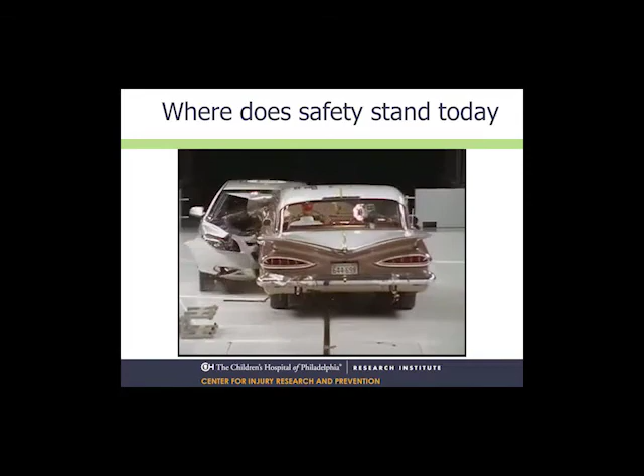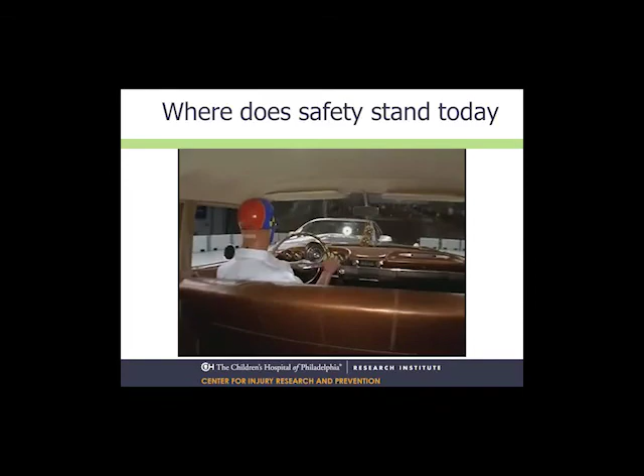So before I close, one quick video on where safety stands today. This is a video by the Insurance Institute for Highway Safety. The car on the right is a 1959 Chevy Bel Air, and the vehicle on the left is a 2009 Chevy Malibu - same manufacturer, almost similar platforms, almost 50 years apart in generations. Pretty brutal impact - this is a frontal offset crash, about 40 miles per hour delta V. Both have an instrumented crash test dummy. What's really interesting is the interior look of what's happening to these vehicles and to these dummies. In other words, we've come a long way - automotive technology and occupant protection.

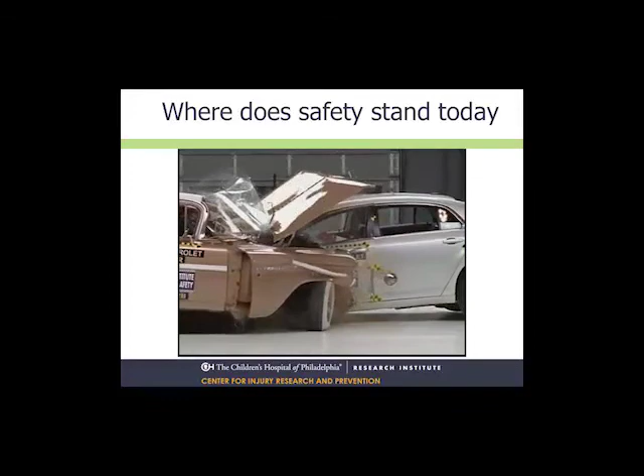This is the 1959 Bel Air. You can see the amount of intrusion that's happening - everything comes apart, the dummy contacts the hood, the roof comes in, and obviously there's no airbag. Definitely a fatal injury for the '59 Chevy Bel Air.

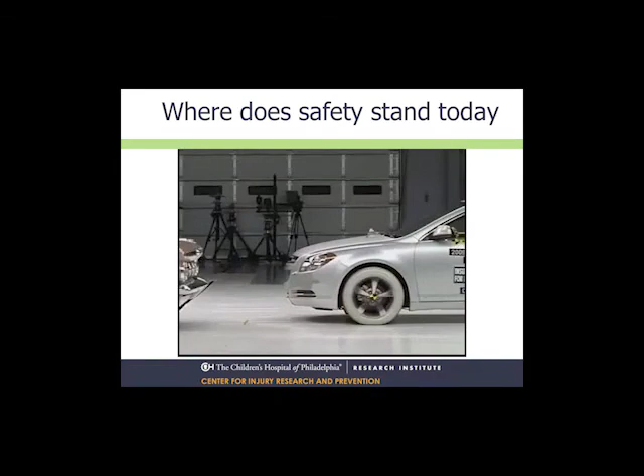This is the more modern Malibu. See what happens - the airbag immediately deploys. Almost nothing's flying inside, and there's hardly any intrusion into the occupant compartment. Looking at the numbers, the dummy was very safe, with head injury well within limits. So we've truly come a long way, and there's still much to do in terms of injury mitigation.